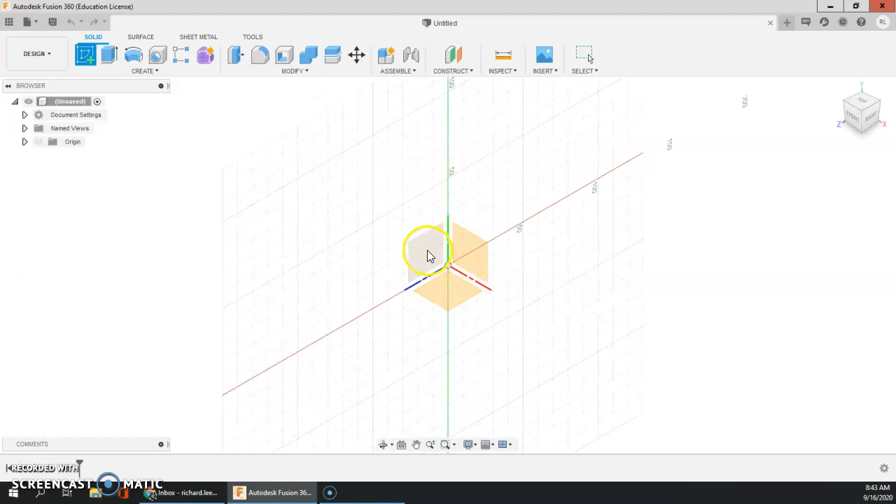So first we're going to start a sketch, and we can choose which plane we want to put it on. This view cube helps you figure out which one is the front. So I'm going to draw the front of the object right here. And I pick that plane.

Now I'm just going to start with a regular line. And when you're starting a new object, it is a very good practice to pick an anchor point of the object, like one of the corners, like a lower left corner, or if you were making a cylindrical object, maybe the center of it. Pick an anchor point of the object and begin it right at the origin of the axes. If I explain why now, you might forget, maybe it won't make sense, but just practice doing this and it'll make sense later. So I'm going to draw the bottom of the object.

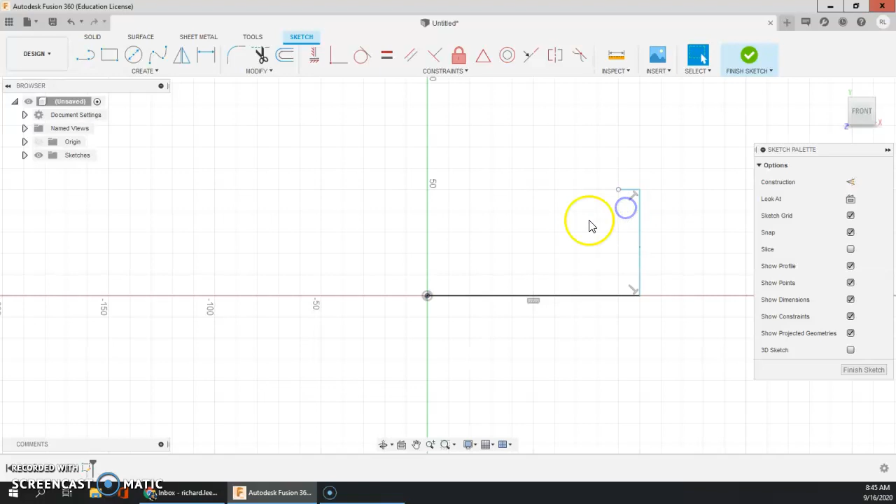I'm going to draw it in centimeters. So in millimeters, that's going to be 100. Side is 5. And we're going to come over 1 right there. I'm going to right click and then exit the line command. And I'm going to draw the same thing on the other side.

Okay, so I've got just the basic outline. I need that little V thing that goes right here. For this thing, we're going to measure, pretend like you're setting up a roof on a house, except it's upside down, and we need to find the pitch of the roof.

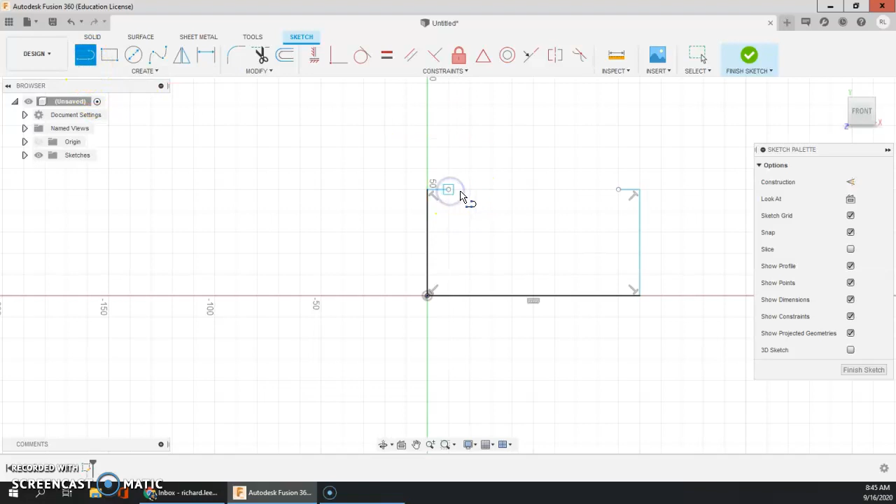So I'm going to make a line that starts right here. It's going to go over 4 and down 4, and I'm just getting those measurements off the drawing. Now, this is just locating where that vertex is going to be, or the pitch of that roof.

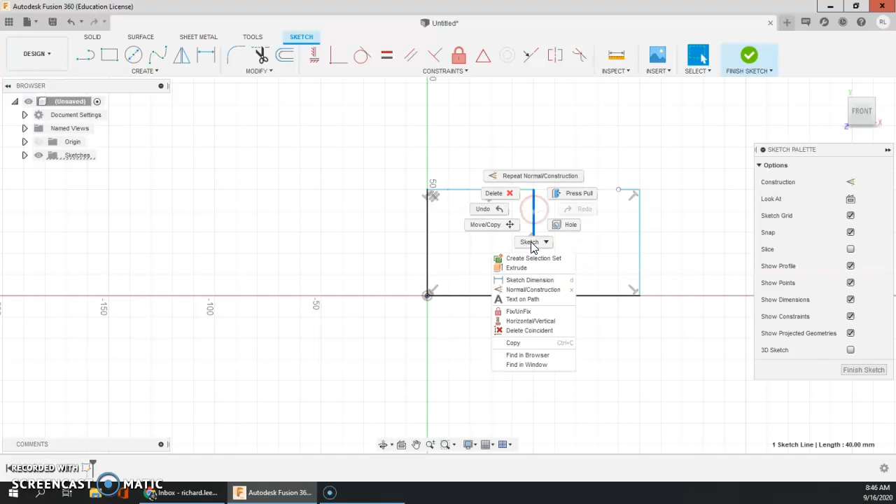I don't actually need these lines to be part of the model. So right now, I'm going to right click on the line and change it to a construction line. I'll do that for both of them. When you have a construction line, it's not actually part of the model. It's there so you can use it for reference, but it's not part of your object. But I need it there so I know where to connect the upside down roof.

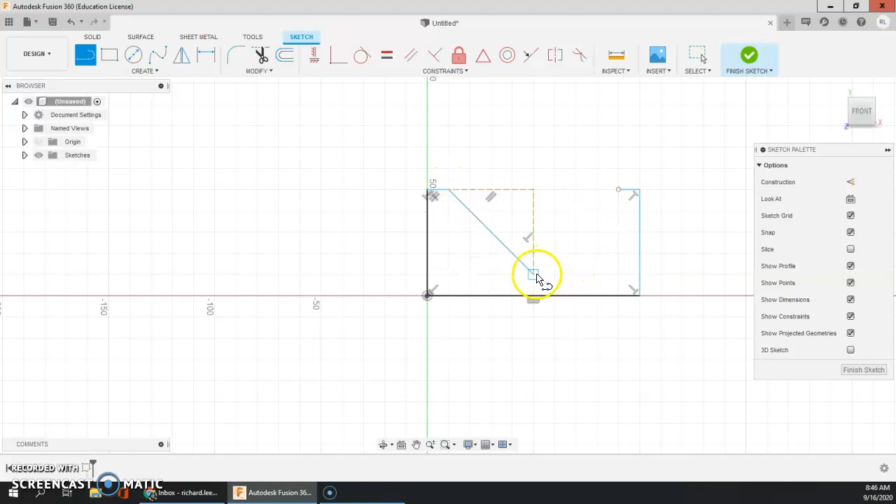So now that I have that endpoint, I can make a line from here to here, and then from here to here. And now I've sketched the first part of the object.

Okay. Now what I need is an opposing plane back here so I can sketch the back part. A work plane is just like a little invisible piece of paper, and you can use it to start a sketch. So to create a work plane back here, I'm going to use construct, and I'm going to pick offset plane. That means I'm picking a plane that already exists as a reference point.

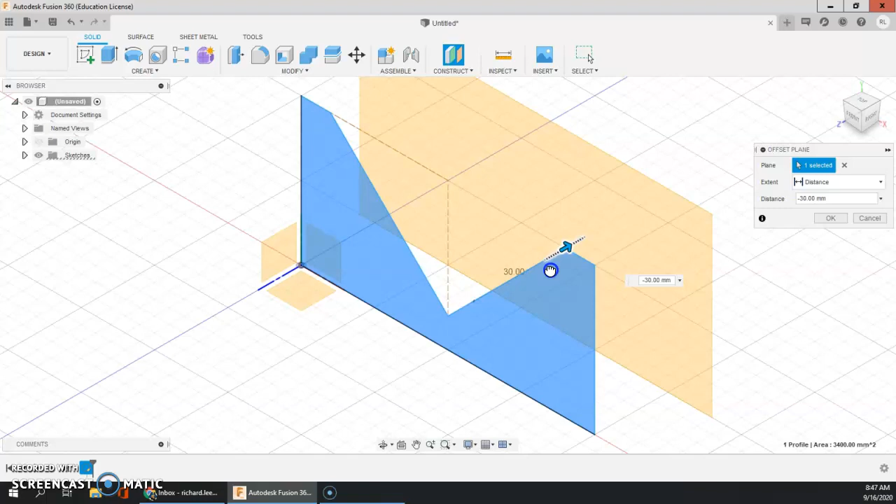This is going to be my reference, and now I have to decide how far is the new plane offset from the reference plane. So they're going to be parallel. So it's going to be offset 3 centimeters.

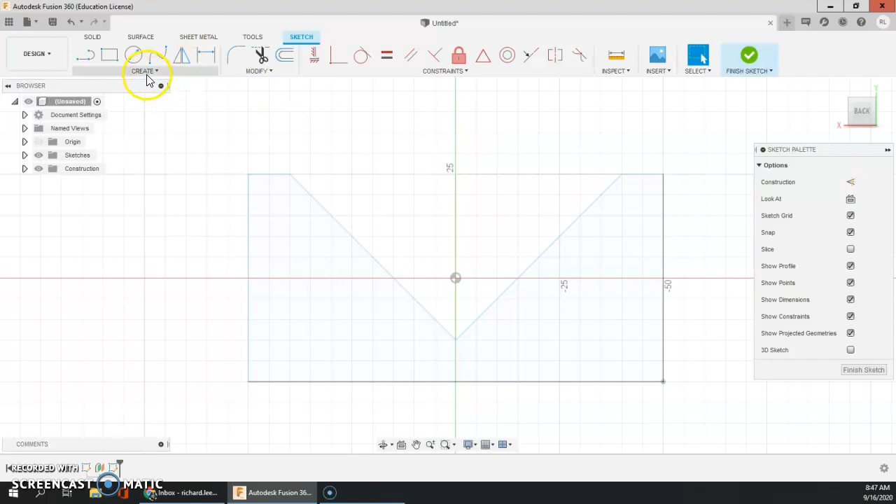Now this is where I'm going to draw the back of the object. So I'm going to start a new sketch, pick this plane back here. I'm still looking at it from the front, so I'm going to spin it around to the back. Okay, and I'm going to follow a similar process, just a couple of measurements are different. So I'm going to start here.

I'm kind of using the front sketch to cheat a little bit. It's not cheating, it's just being faster. And this one's going to go over 3 centimeters. And I also need one on this side. Okay. And I'm going to repeat the same process.

I'm going to find the pitch of that roof. It's like an upside down roof. So that's going to go over 2 and down 2, and I'm going to right click and choose OK to exit the line command.

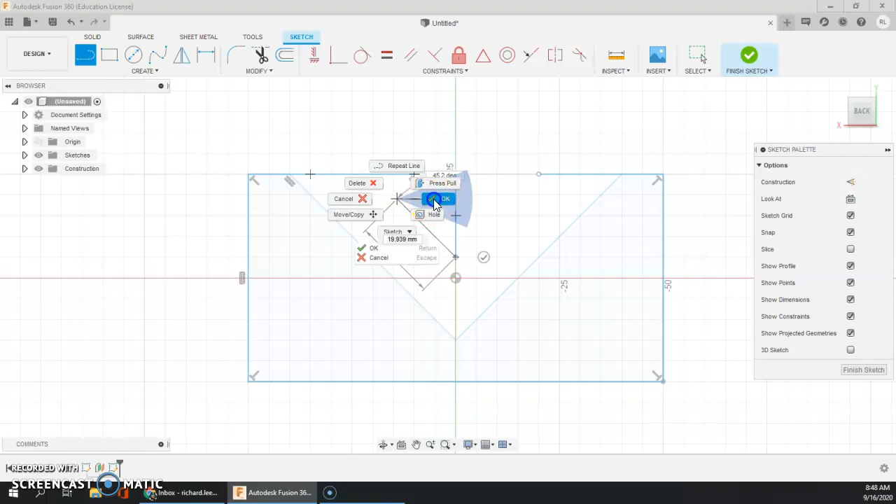Now I don't want these lines to be an actual part of the model, so I'm going to right click on it and change it from a normal line to a construction line. I got that one. Go try again. There we go. All right, for some reason I didn't get it. There we go.

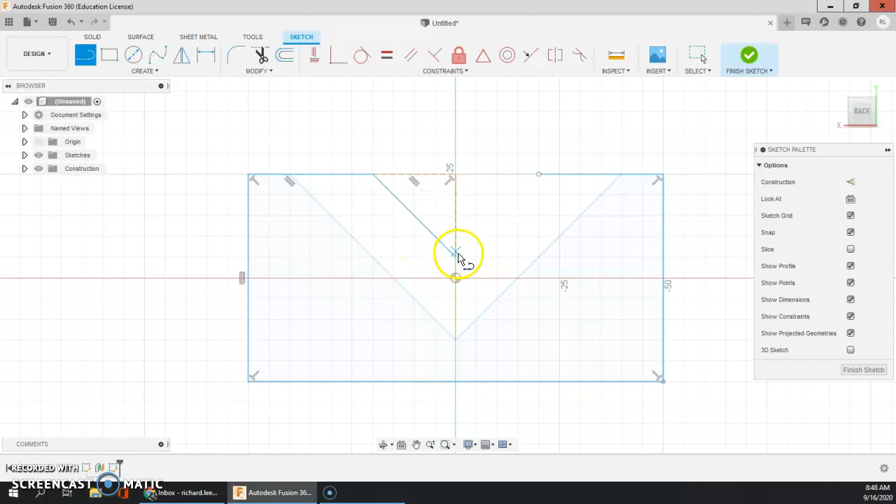All right, so now I know where my endpoints are. It's going to go from here to here, and another one from here to here. Now, you always have to click Finish Sketch before you can turn a 2D sketch into a 3D feature. And that Loft command is hiding. Where is it hiding? There it is, Loft.

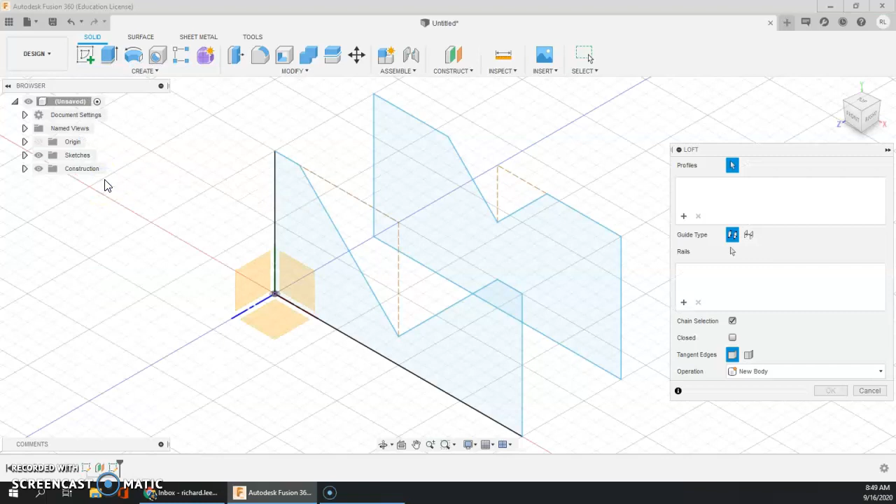And when you're lofting things, you essentially have to tell Fusion what two sketches are you lofting. This one and this one. And it's already figured it out. Voila, there is my model.

And one note about sketches, you have to make sure you have a closed sketch. So you can't have any gaps or openings, kind of like having a break in an electrical circuit. You can't, all your endpoints have to be connected. If you don't have connected endpoints, you won't be able to extrude or loft or create a 3D feature from a 2D sketch.